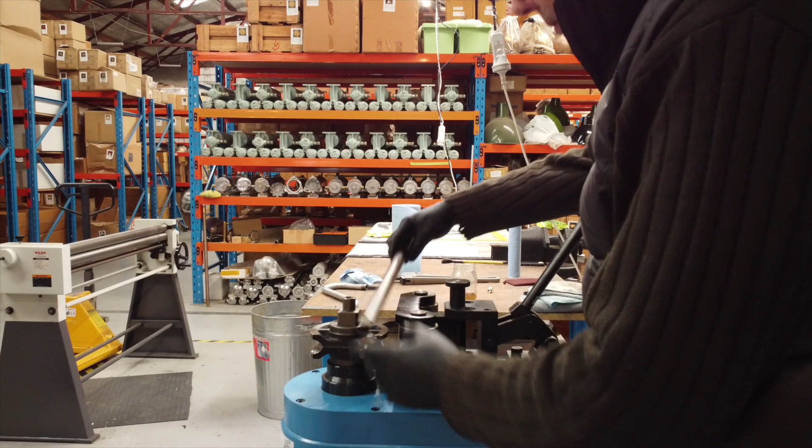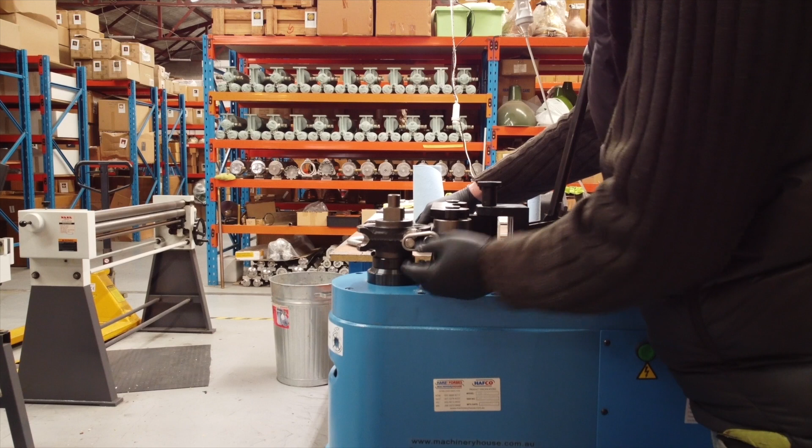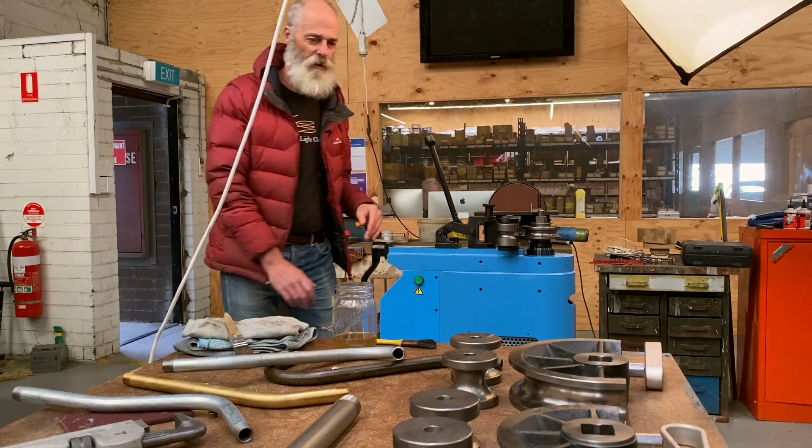So to this device, the Hafco high power pipe bender. Now, this is designed to bend plumbing pipe exclusively, and we have for this device a number of formers, and these formers are for specific pipe dimensions, so 1/2 inch, 3/4 inch, 1 inch, 1 1/4. Now, these use different dies, and you'll see here the die for 1 1/4.

Is that, Louis? You can't see, you've got to come in close.

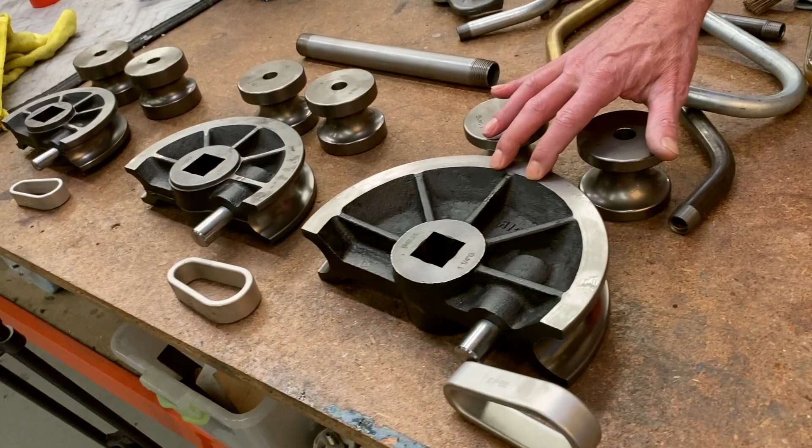That's 1 1/4. This is for 1 1/4 pipe. Over here we've got 3/4 pipe. Sorry, that's 1 1/4. This is 3/4 pipe. You'll see there's two sets of devices, the inner and outer, the roll, and this is exactly the dimension of the plumbing pipe that we're going to bend.

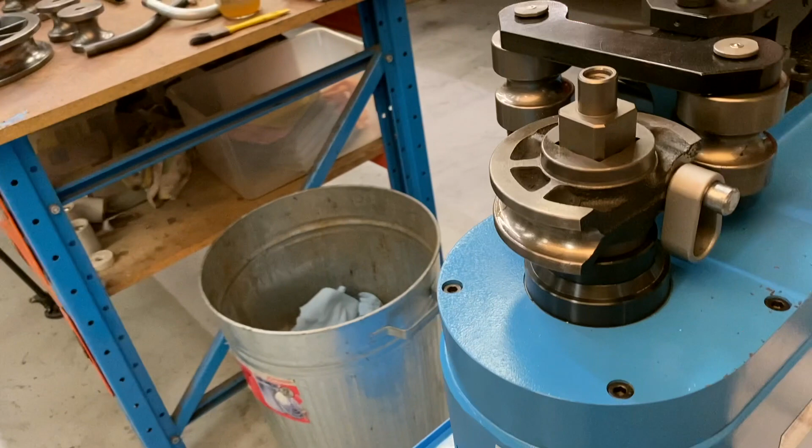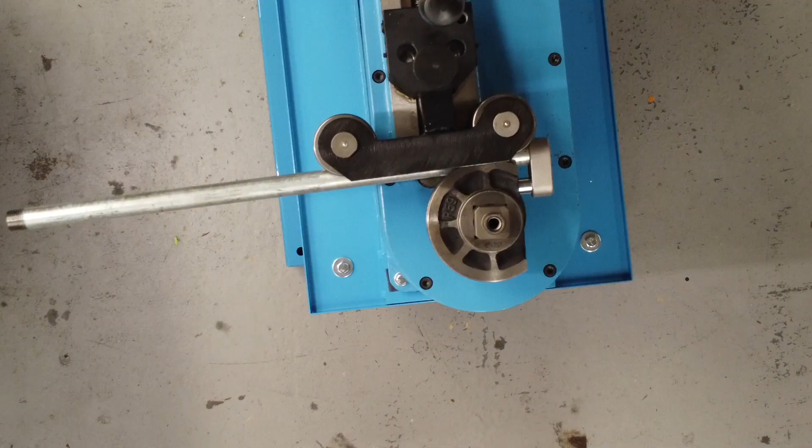The job we're doing here is actually a 1/2 inch pipe. And this, you'll see, fits exactly, get a bit of pipe, fits exactly the dimension of 1/2 inch plumbing pipe. So the idea of bending exactly to the die, 1/2 inch pipe, means that we can put an angle on this in a couple of directions and end up with a gooseneck or a slight bend.

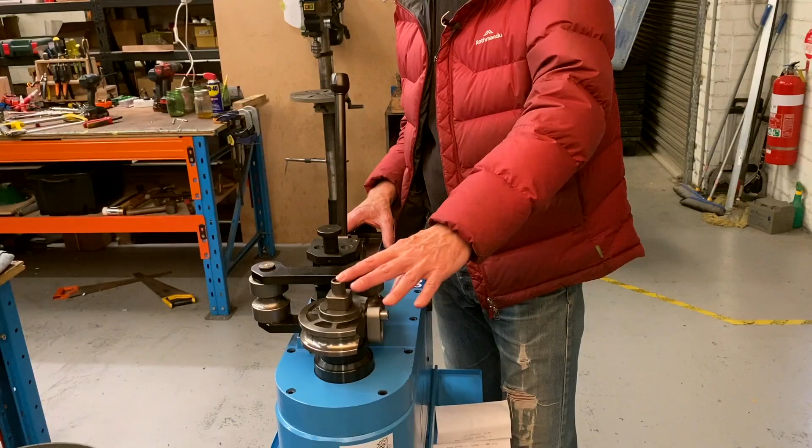Now, the limiting factor is obviously the radius of this. You can see this has a specific radius, and that's the only radius that you can bend. You don't have to bend 180 degrees or 90 degrees. You can bend it in any segment of that radius, but it will be that exact radius. So you've got to do compound bends to create your overall shape.

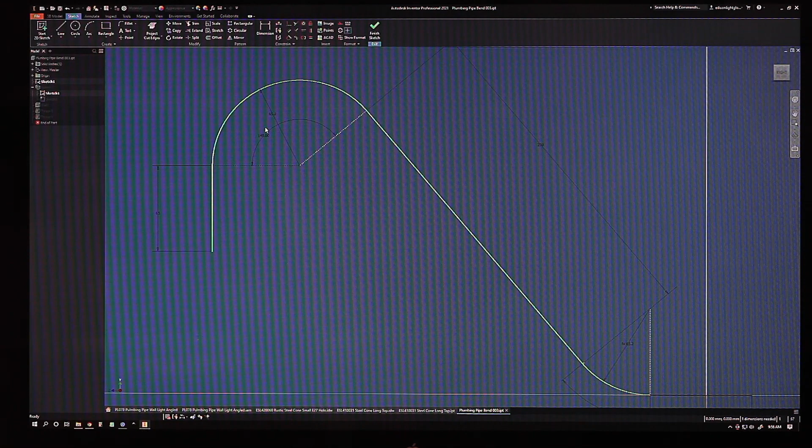So with that in mind, what we did to create a new product was to get it open inside our CAD software. I can't remember what it's called. AutoCAD? Or not AutoCAD. It's called Inventor. So we get in Inventor, we open it up, we have a look, and we try to design a shape, sometimes a shape with a shade, without a shade, with attachments, just to see what shape we want to bend.

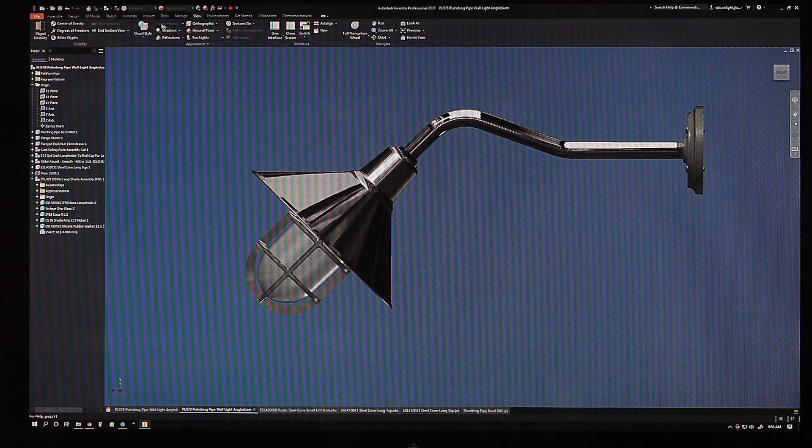And then we have to come back to the machine and calculate a whole lot of things that this machine does, like the arc, the bend. It's got spring back, so as you push it and bend it, it'll spring back after you release. So you have to take that into account when you're bending. There's a whole lot of things that this machine does really well and repeatedly. So it can create a product over and over again with a little bit of programming.

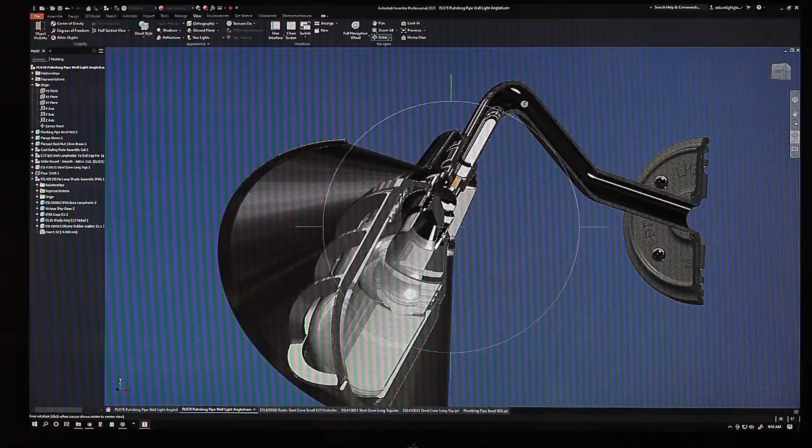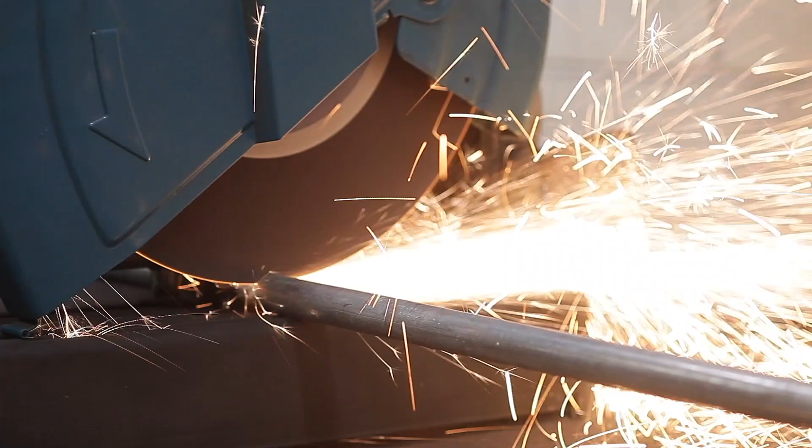So we'll proceed and show you how that works. The first thing we need to do is, from our design, cut a length of pipe and make sure that we've got that to accommodate our design. Once that's cut, we then just clean up the ends, deburr, and put it through the threader.

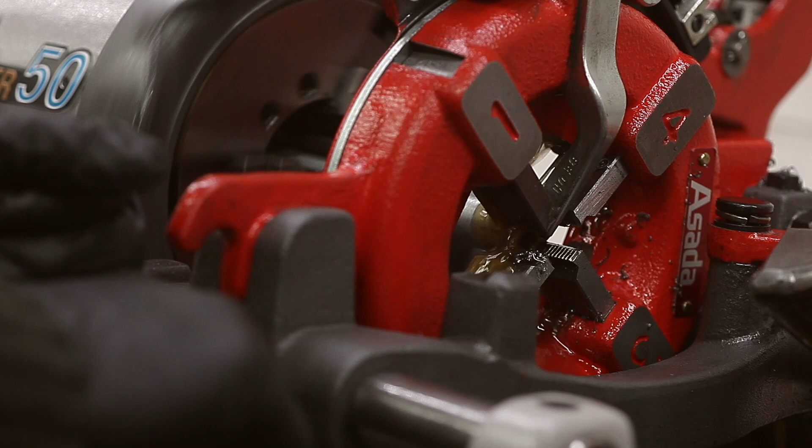And once it's threaded, then we can put it in the machine and bend it, because you can't thread the pipe after it's been bent because it won't go round inside the threading machine. So that's the sequence. The next part of that sequence has got to do with the individual light, how you want to use it. If you're just going to put a lamp holder on the end, it's quite simple with our devices, our connectors that you use to connect a lamp holder.

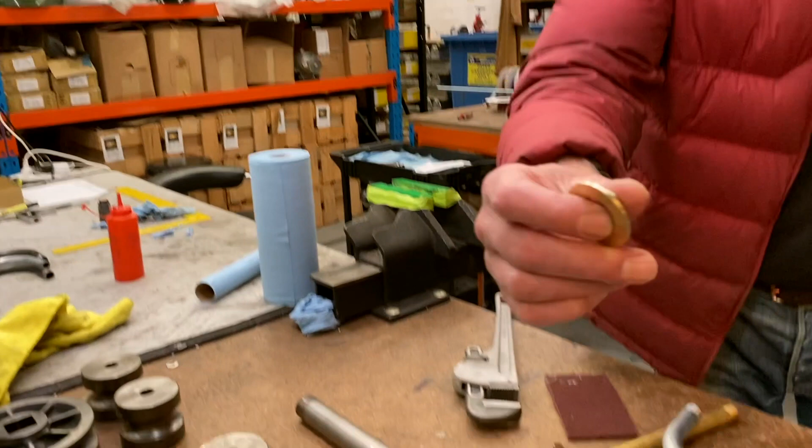But it might be that you want to connect a shade, and there's a whole range of ways you can connect a shade. We have a specific device, and we'll show you here. This is like a flange back nut, and this will go on the top of the fitting, so that once the pipe comes through, I won't do it up, you'll be able to attach a shade and then another nut underneath to hold the shade, and then lamp holder and such over there. We'll show you how that works.

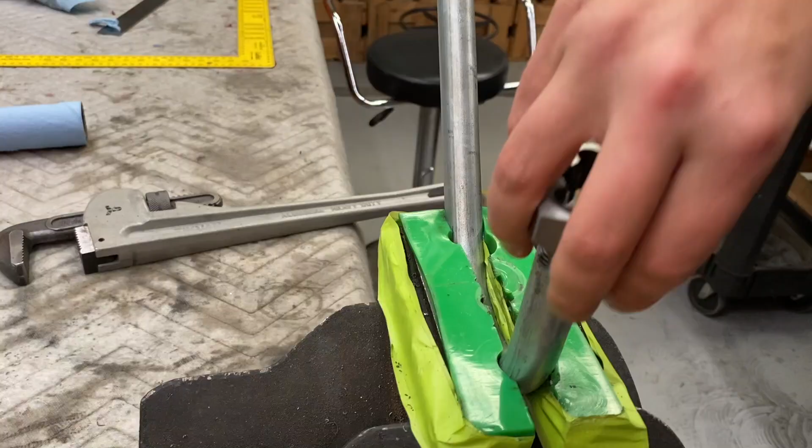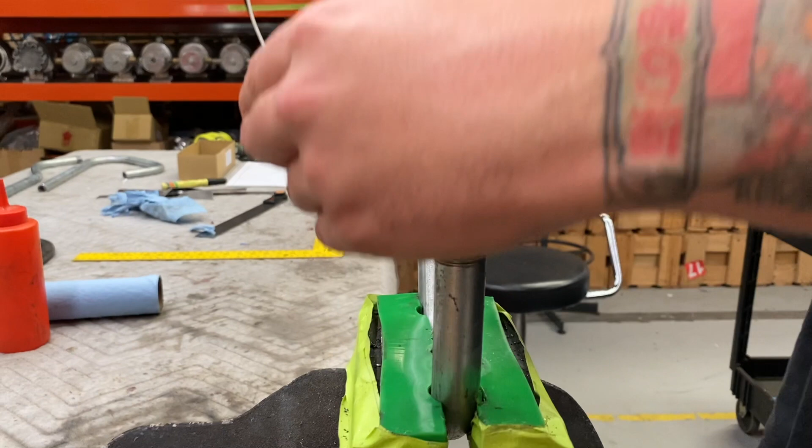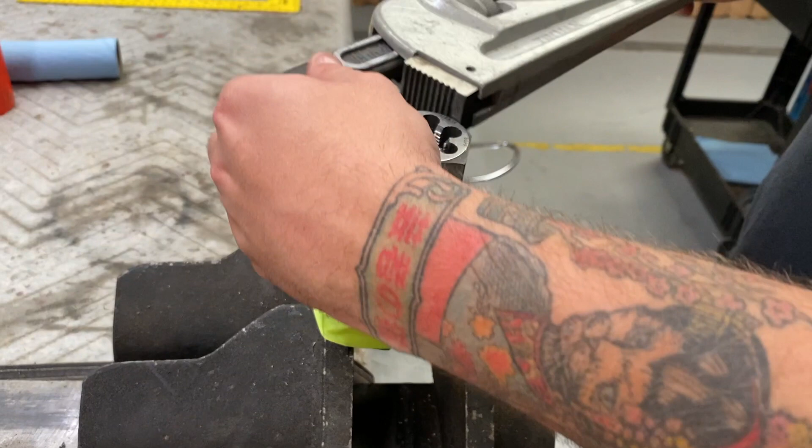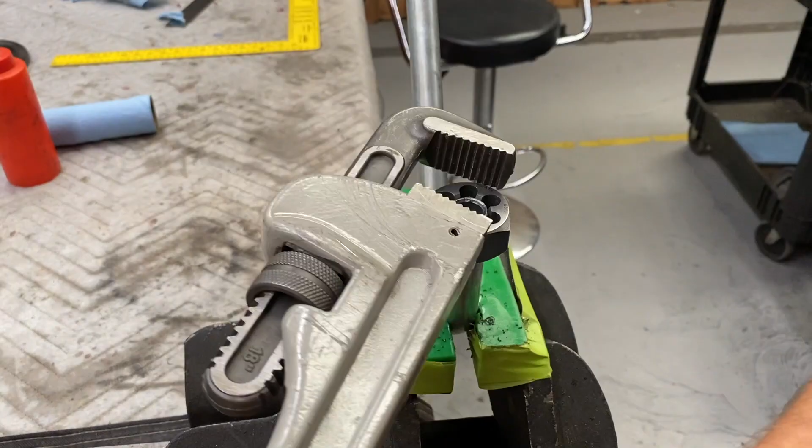So what we've got to do is put the die onto the pipe. Now as you can see, this is threaded, it's a tapered thread, which means it tightens slowly when we put something onto it. Now what we want to do is get rid of that taper. So we're going to run the BSP die over the top and cut that thread straight so that it will be able to take our nut, and the nut will go all the way to the end of the thread. So the idea is just to pull this down. It will fit over the thread that's been placed there with the tapered thread machine.

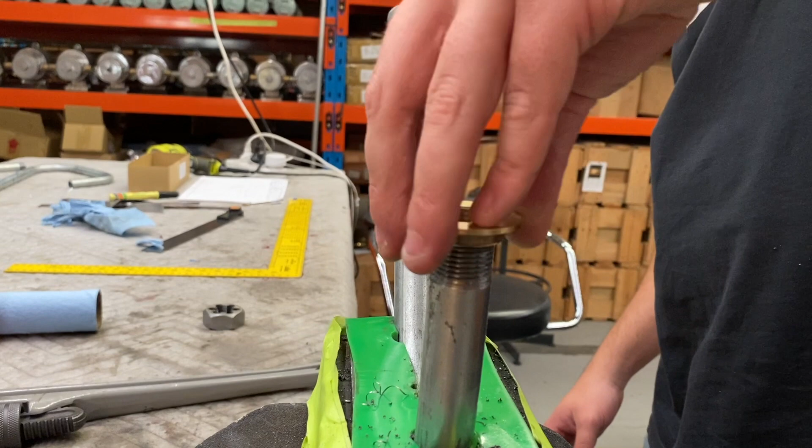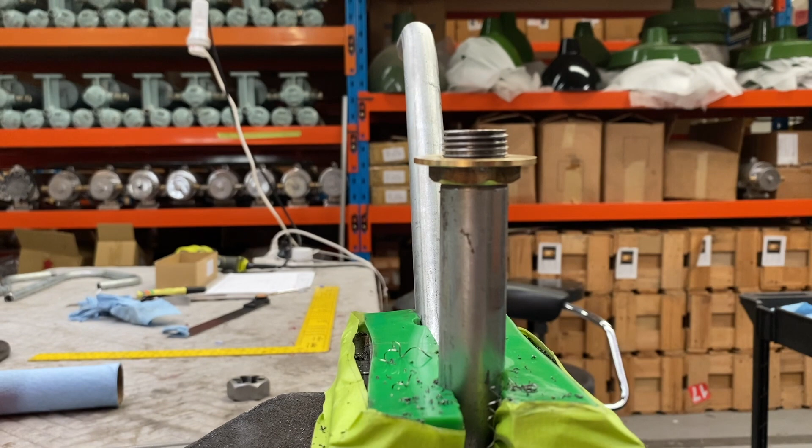You see now that thread has been straightened, it's no longer a taper, and hopefully, again with a shifter, we'll be able to do this nut. Oh, there you go. That goes all the way down. So you can see that nut has now been able to tighten all the way down. That'll do. That's all right. Wasn't quick enough. Okay. That nut's all the way down.

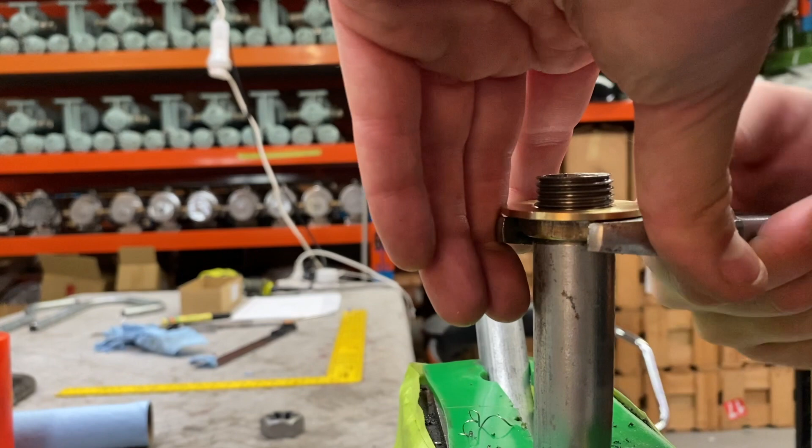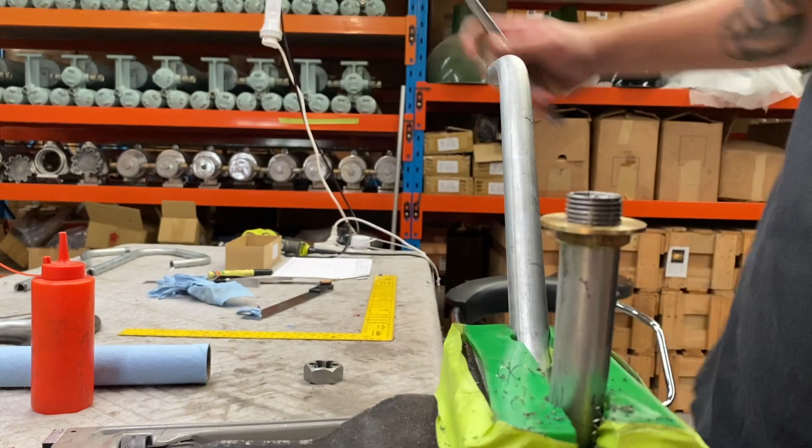You're going to get in my way. You can tighten it up. And I don't know if we've got a shade handy to put on top. Over there, Louis.

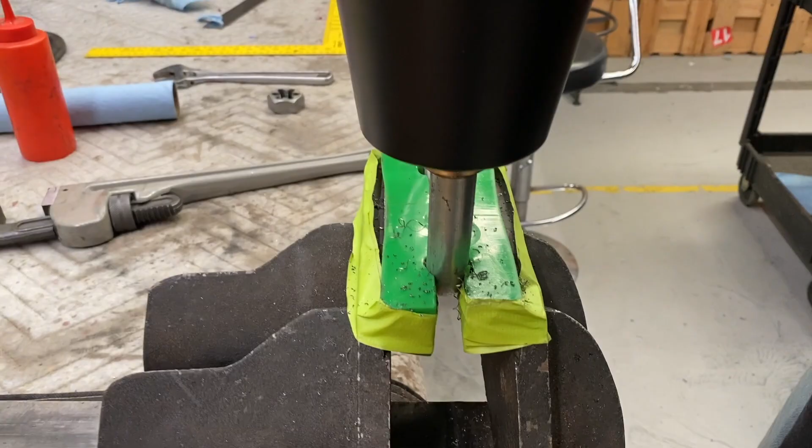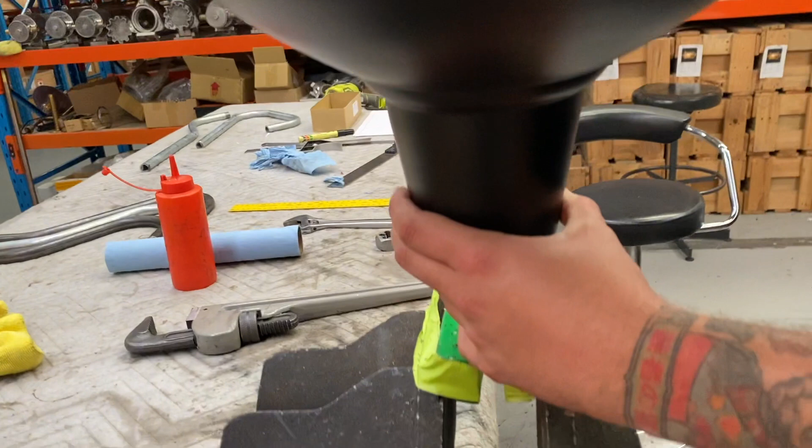Black one. See, this shade has a particular hole. That's a hole that's 22.5 mil to take our 1/2 inch pipe, which is 22 mil, and that should go on. And there we can see the pipe protrudes, which gives us a way to connect a lamp holder inside this shade, and also to bond the shade so that it doesn't move around. Move your hand. So you'll see the back nut there just attaching on the other side to stop it from going the other way. So you can see that there are a few applications for this machine. We will continue to experiment and create a few more designs.

And the other thing we might do, and in fact very soon, we might put just tapered, bent gooseneck pipe sections onto our website for anybody who's in DIY country who wants to create their own gooseneck lamp. There's a whole lot of components that you might want to use either end. So we've got obviously a wall plate that you can use. You could use your own flange if you like. But we will start to bend a few of these in standard gooseneck shapes so that you can make up gooseneck lights at home, if that's what floats your boat.

So anyway, we'll show you a bit more of the machine as we use it later, as we do other designs, as we do other products. But for now, I think we'll leave it there.